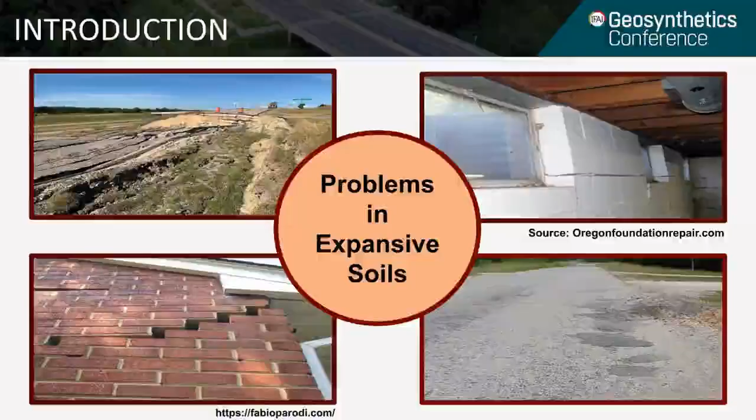Additionally, the basements of buildings are also affected due to the soil pressure of this kind of soil. On the bottom right, we can see pavements built on expansive soils suffer from rutting, cracking, and differential heaving due to the soil shrink-swell behavior of the expansive subgrade over time during its serviceability.

Now let us discuss in detail some of the major problems of pavements built over expansive soil in Texas. These soils are characterized by high plasticity indices and major swelling and shrinkage potential. On the right, we can see that when water migrates into these soils during rainfall, they undergo heaving. Alternatively, during summer months, when they dry up, they develop potential surface cracks. These problems affect the long-term performance of the pavements.

As a result, these roads need regular maintenance and substantial cost is involved in maintaining such pavements. Texas Department of Transportation Pavement Manual recommends certain measures to deal with such problems, which includes chemical stabilization with lime, cement, and other traditional and non-traditional stabilizers, replacement with superior quality geomaterials, which is not always a suitable option for some locations, and utilization of geosynthetics.

However, the cost of using geosynthetics with virgin aggregates may increase the overall project cost, and also the use of virgin aggregates is not a sustainable solution to pavement construction. As a result, in this project, we have tried to look into the effects of using a moderate quality base material known as reclaimed asphalt pavement aggregates, or RAP aggregates in short, in combination with a newly available geotextile and their effects on pavement performance.

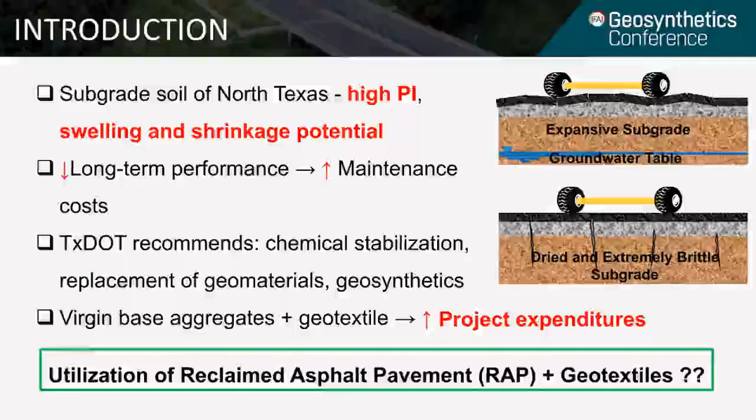In the present scenario, the use of recycled materials could provide us with long-term sustainable solutions. In an estimation by the National Asphalt Pavement Association, we have 102 million tons of RAP aggregate stockpiled all over the United States. In Texas, we have a fair share of stocked RAP aggregates which TxDOT plans to recycle and reuse instead of virgin aggregates. On the right, we see a picture of one such stockpile from where we collected the RAP aggregates for our laboratory studies.

A newly available wicking geotextile, popularly known as H2Ri, has been used in this project. This geotextile has special hydrophilic and hygroscopic deep groove fibers which are capable of draining out moisture in an unsaturated environment through suction. This single geotextile layer can perform multiple functions.

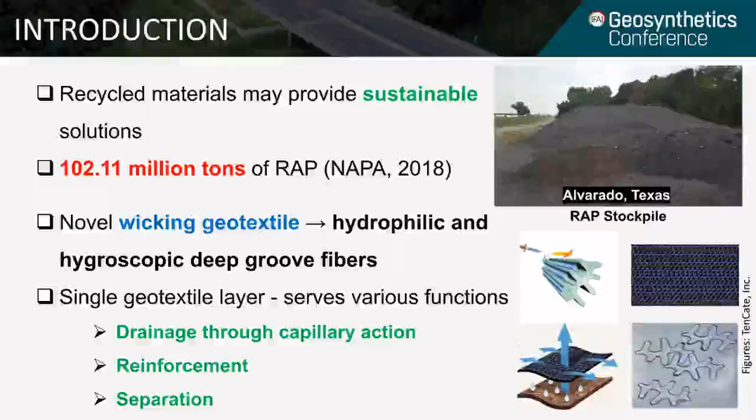In addition to the traditional separation and reinforcement function, this geotextile drains out moisture from pavement layers through capillary action rather than only gravity drainage.

This figure shows the schematic diagram of our test section, located at FM 1807, Venus, Texas. It predominantly sits on a high expansive zone as seen from the map. This location was chosen because of its history of pavement failure through cracks and ruts, even after maintenance by the TxDOT maintenance crew. The eastbound lane has been used as a test section, whereas the westbound lane was used as a control section.

The test section consists of a subgrade soil which is expansive in nature, followed by a 15-inch base course of RAP aggregates. The wicking geotextile was installed in between the base and the subgrade layer. The surface layer consists of a 2-inch asphalt overlay.

The test section was installed with a number of sensors as shown in the figures below. Shape array accelerometers were used for measuring the vertical deformation below the wheel path. Pressure sensors, or earth pressure cells, were installed to monitor the stresses at the top of the subgrade, and moisture sensors were installed to monitor the moisture redistribution pattern below the pavement layers.

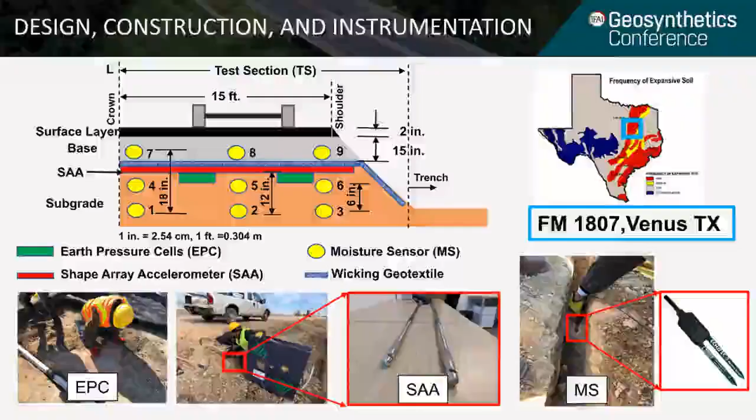The design of the test and control sections were performed using a standard design software recommended by the Texas Department of Transportation known as FPS-21. FPS-21 is a mechanistic empirical design procedure that uses a performance model based on the degradation of the serviceability index as defined in the AASHTO road test research.

The material properties of the pavement layers, the traffic loading, the change in serviceability rating, and the desired level of reliability are then used to compute alternative structural designs using FPS-21. The modulus of the subgrade for the reinforced layer was obtained by multiplying a modification factor as obtained from Lin et al. 2019. Design parameters such as annual average daily traffic, average traffic speed, and percentage trucks are shown in the bottom right corner.

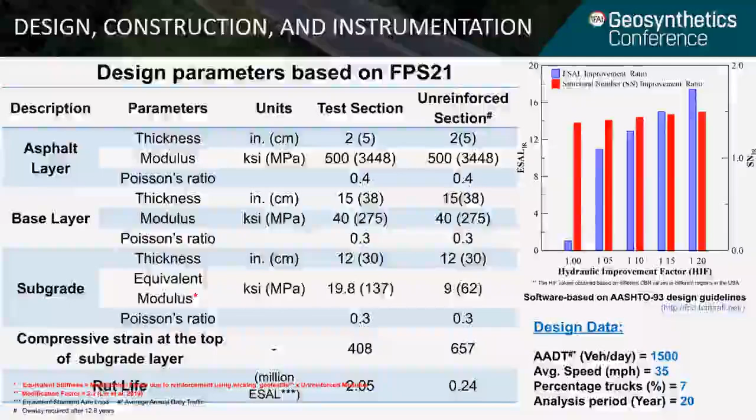The plot on the right shows the influence of the wicking fibers in improving the equivalent standard axle load and the structural number of the reinforced layers by the inclusion of a hydraulic improvement factor. This factor was obtained based on a study from different locations in and around the United States and Canada. Using the design data and the hydraulic improvement factor, a software listed on the manufacturer website was used to obtain the values of this plot.

Here we can see some of the steps involved during the construction of the pavement layers. It started with milling of the existing pavement layers, followed by excavation until the desired depth was reached. Thereafter, the subgrade layer was leveled and compacted using both pneumatic and drum rollers until the target density and moisture content was reached. After compacting the subgrade, the geotextile layers were laid on top of it.

After laying the geotextile layer, the pavement was again backfilled with RAP aggregates and compacted until target density and moisture content was reached. Thereafter, the pavement was kept open to traffic for another 7 days, after which the TxDOT construction crew came back and laid the layer with a prime coat and asphalt layer. After laying the asphalt layer, the pavement was rolled, and finally at the bottom right we can see the pavement after the construction was completed.

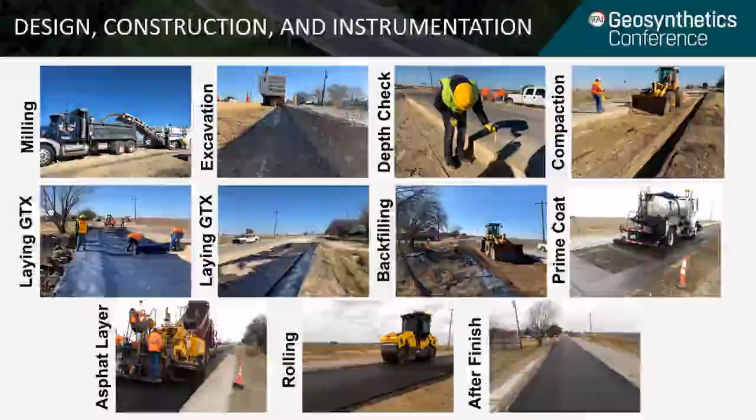Effect of wicking fibers on subgrade moisture. Here we would like to focus on an important property of the wicking fibers.

Currently, no experimental studies exist which indicate the influence zone of the wicking fibers. Therefore, in this paper, we try to introduce a preliminary concept for the estimation of the zone of influence up to which the wicking fiber has an ability to remove moisture in a fine soil subgrade.

In the past, some numerical studies have been done by Lin et al. for predicting the zone of efficacy of wicking fibers below and above the geotextile layer. However, they were mostly related to a different coarse-grained material. They indicated that the wicking fibers have the ability to drain out moisture as far as 3 feet from the fiber layers. They also noted that the primary efficacy of the wicking fiber to remove moisture reduces significantly beyond 15 inches from the geotextile layer.

Additionally, they also observed that a small reduction in moisture content could significantly increase the subgrade modulus.

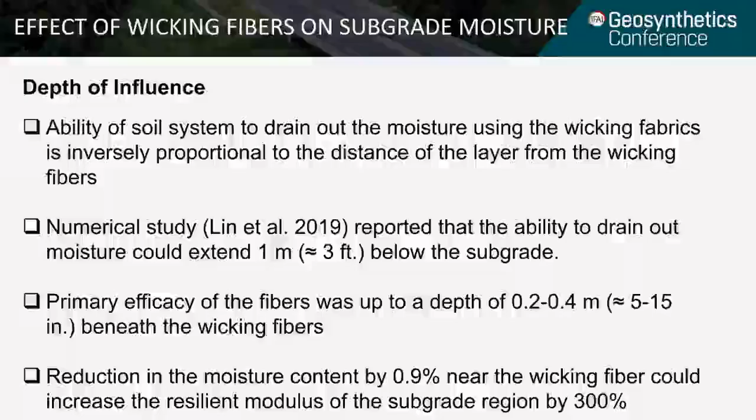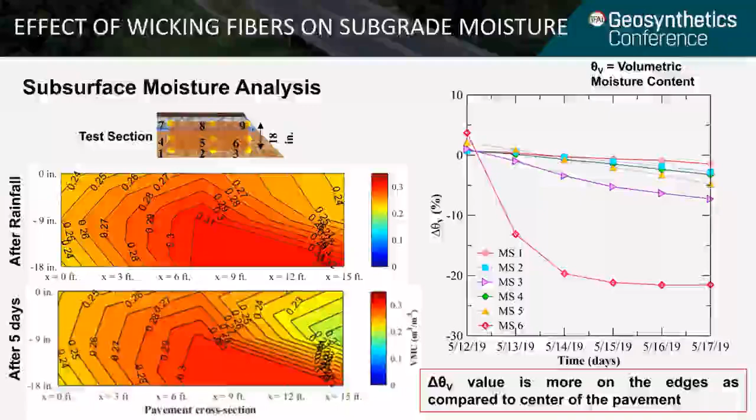After looking into the moisture conditions below the pavement layer, we now look into another important aspect of pavement performance: permanent deformation. As seen previously, the wicking fiber can rapidly drain out moisture from the pavement layer, which directly impacts improving the pavement modulus. As a result, the pavement undergoes lower permanent deformation due to the combined effect of the expansive nature of the subgrade and traffic loads.

Also, the geotextile has a higher tensile modulus property which reinforces the weaker subgrade and reduces the stress on top of it due to traffic loads. The combined effect of these factors is visible on the plot shown on the right.

The SAA sensors were used to monitor permanent deformation below the wheel path in the test and control sections. The test section showed lower permanent deformation compared to the unreinforced control section. The performance of the control section degraded significantly after a heavy rainfall event in May 2019. This indicated the overall efficacy of using wicking fibers in pavement layers.

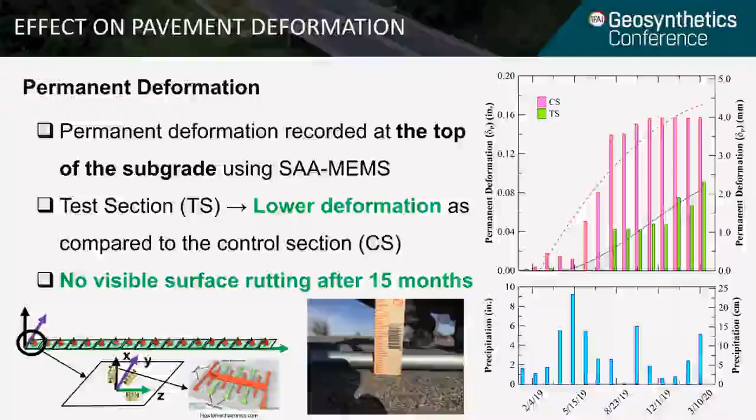Also, in the figure below, we can see that the pavement surface in the test section shows no visible rutting or cracking after the current monitoring period.

To conclude, we can say that the wicking geotextile was effective in redistributing moisture rapidly within the pavement layers after any rainfall event. The efficacy of the wicking fiber was more prominent near the pavement edges because of surface evaporation as well as the wicking action of the geotextile, compared to the center of the road.

The efficacy of the wicking fibers to remove moisture reduced by over 50% at 6 to 12 inches below the pavement layers. However, it should be noted that even a small amount of moisture reduction could substantially increase the resilient modulus response of the pavement, and hence affect long-term pavement performance.

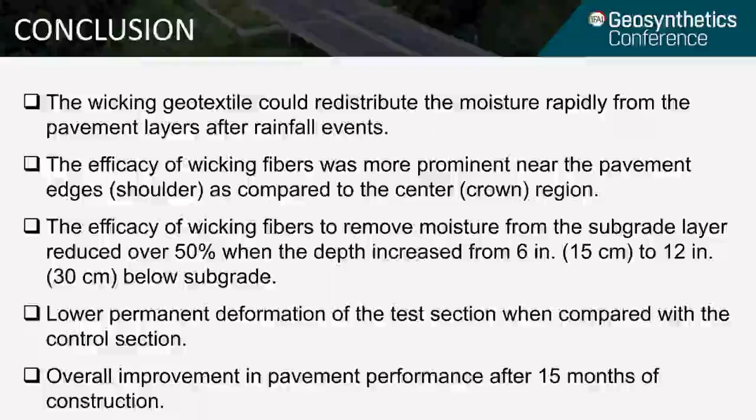Also, a lower permanent deformation was observed in the test section compared to the control section. Therefore, we can safely say that as of now, pavement performance has significantly improved due to the inclusion of the wicking fiber. We are currently monitoring pavement performance for another couple of years, after which we could provide some design recommendations and guidelines.

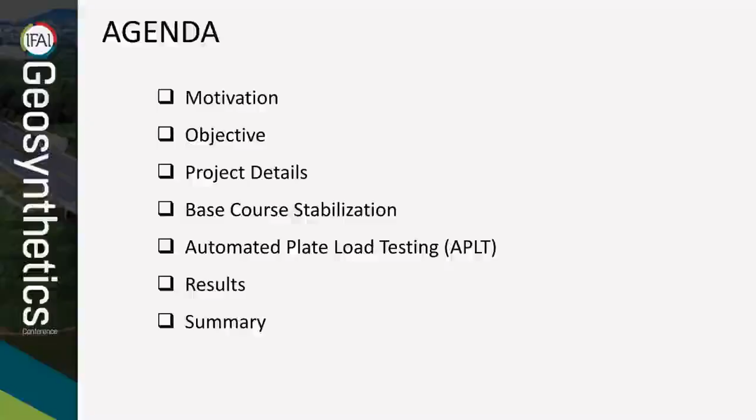This is the outline of my presentation. I will start from the motivation of the study, then the objective of the study, then describe some details of the project, then the concept of base course stabilization and automated plate load testing, then the results, and at the end I will summarize the key findings of the study.

Currently, laboratory-based testing methods are usually adopted for the characterization of pavement materials. Materials from different pavement layers are individually tested in the lab and used for deriving their mechanical properties. During pavement design and analysis, information from lab data is used for modeling pavement sections and estimating pavement performances.

But there are several challenges associated with lab-based characterization methods. This includes limited sample size, the lack of effective interaction between different pavement layers, and more importantly, there is no representative boundary condition.

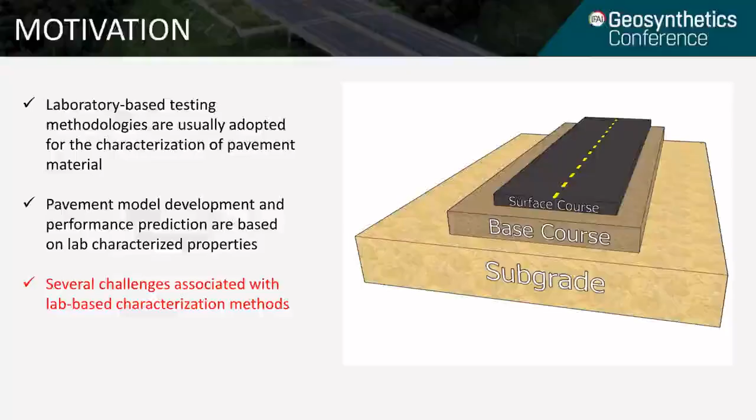For example, AASHTO T307 protocol is used for deriving resilient modulus of unbound pavement materials. Repeated load triaxial testing is performed on small cylindrical specimens for deriving resilient modulus values for different materials. The confinement applied in the cylindrical specimen represents the confinement that occurs in the field, and vertical axial stresses are applied at different load frequencies or stress levels to mimic the trafficking condition.

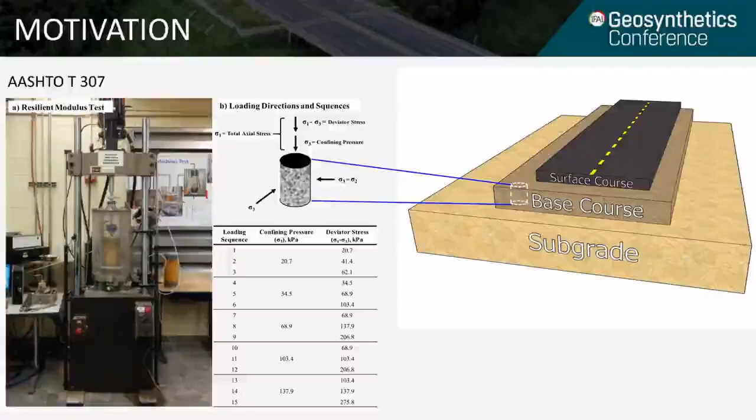But although this approach is very advanced, it still lacks the effective interaction of different pavement layers. In order to get around lab-based characterization methods, some field-based plate load tests are also performed using static or impact loads.

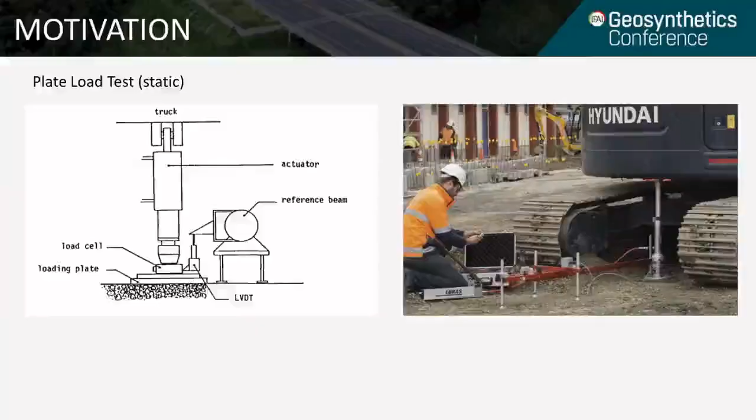Usually a truck, heavy vehicle, or other heavy object is used for applying loads, and these tests are performed by applying monotonically increasing loads. But again, the challenge with this type of test is that the loads are not representative or comparable to the traffic condition.

Falling weight deflectometer or heavy weight deflectometer are examples of plate load tests that use impact loads. The deflection basins due to the impact loads are analyzed for deriving pavement material characteristics. But the impact loads used in this type of testing are not representative of actual traffic conditions.

So we need a different kind of plate load test that uses dynamic loads and is more representative of actual traffic conditions. In this study, we use automated plate load testing that uses dynamic loads.

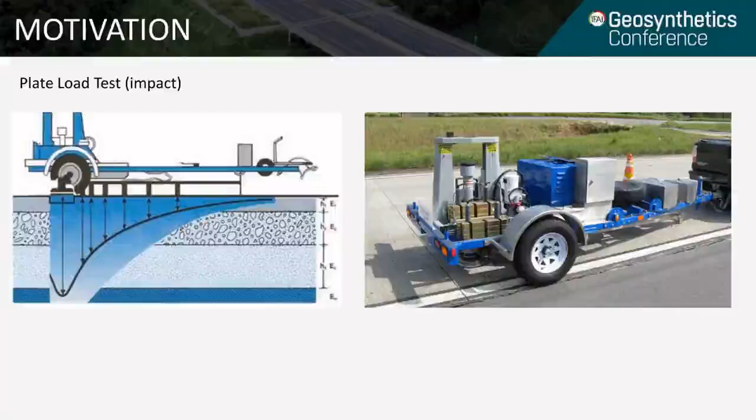The objectives of this study are to evaluate in situ mechanical properties for geogrid stabilized and unstabilized pavement using the APLT system, or automated plate load system. The unstabilized pavements represent pavements without any kind of geogrid. Another objective is to measure resilient and permanent deformation responses, and the last objective is to estimate pavement model parameters such as composite modulus and layer-specific modulus for HMA, aggregate base course, and subgrade.

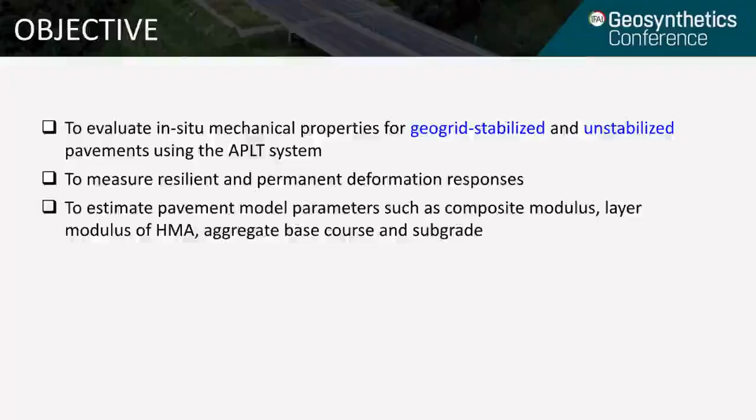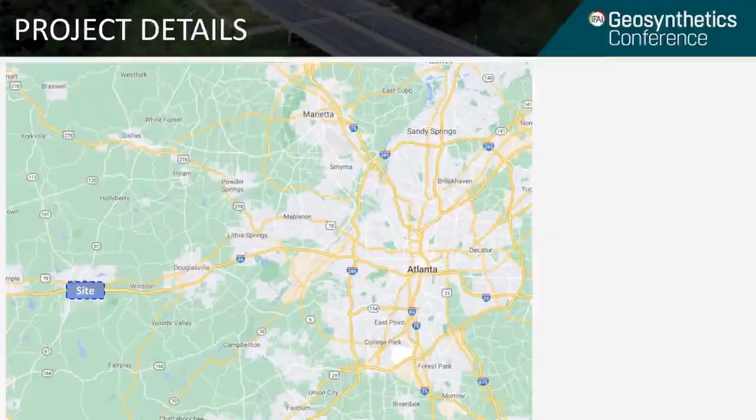The project site was located near Atlanta, Georgia. The test sections were part of Interstate 20, located about 30 miles west of Atlanta. There were three sections: Section A, Section B, and Section C. Section A and B were geogrid stabilized sections, whereas Section C was an unstabilized section, or control section.

In the case of geogrid stabilized sections, the thickness of aggregate base course was reduced by 20 to 40%, whereas the thickness of HMA was the same for all cases. There were also some small differences in the subgrade condition. The subgrade CBR ranges between 15 to 25%.

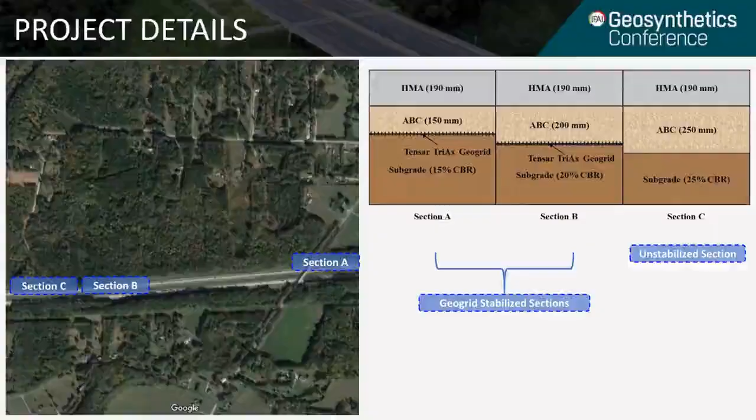Geogrid stabilized sections were prepared by placing a layer of geogrid at the interface of base and subgrade. A triangular aperture geogrid was used for these projects, and the properties of the geogrid are shown in the table.

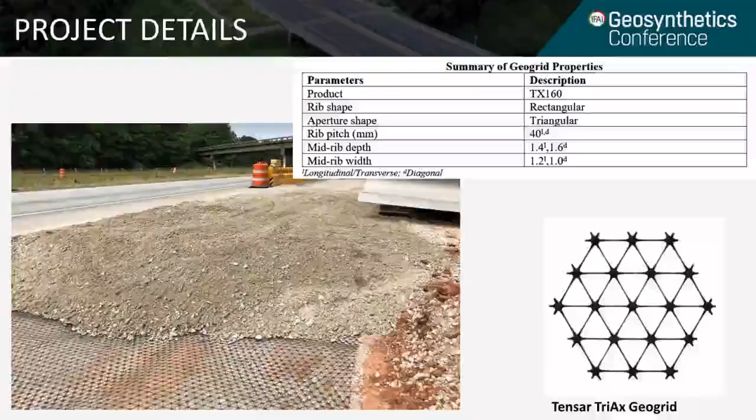Let's talk about the benefit of using geogrid through the concept of base course stabilization. When a geogrid is introduced at the bottom of the aggregate layer, it creates different confined zones within the aggregate layer. A layer close to the geogrid will be fully confined, and as we move further, the confinement level decreases. But in general, geogrid plus soil will form a composite, strong, and stable aggregate layer.

This can be explained by the lateral restraint of the aggregate at the bottom of the aggregate layer. The use of geogrid will prevent lateral movement of aggregate, and this can also be explained by the change in the shear failure plane caused by using a geogrid. That is, when a geogrid is used, it will prevent shear failure of the subgrade.

So base course stabilization will contribute to enhancing the stiffness of the aggregate layer and also retaining the stiffness of the aggregate for a longer period of time. This is a little bit different from the concept of reinforcement.

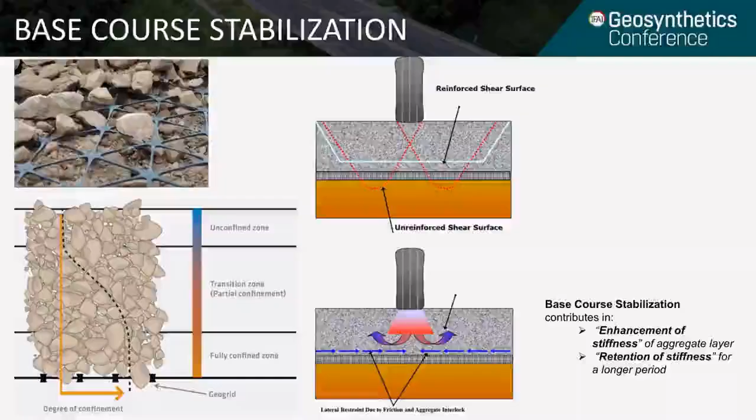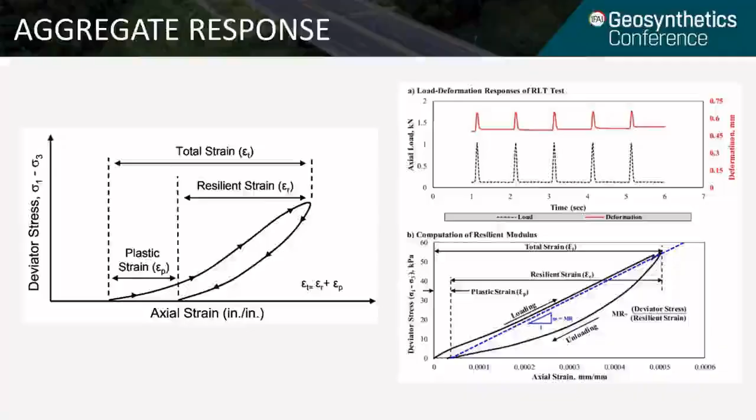Unbound aggregate layers possess elastoplastic behavior. That is, for each load application or loading cycle, the total deformation experienced by the layer will be the sum of permanent and resilient deformation. A portion of the deformation induced in the pavement is plastic deformation, and the rest rebounds as resilient deformation. So we need to understand how the pavement behaves due to repetitive load.

The APLT system can measure both resilient and permanent deformation responses from the pavement surface using precise measurement. In fact, the APLT system is an advanced portable laboratory where a plate load test can be performed by varying different loading conditions such as loading rate, load magnitude, and different types of plate.

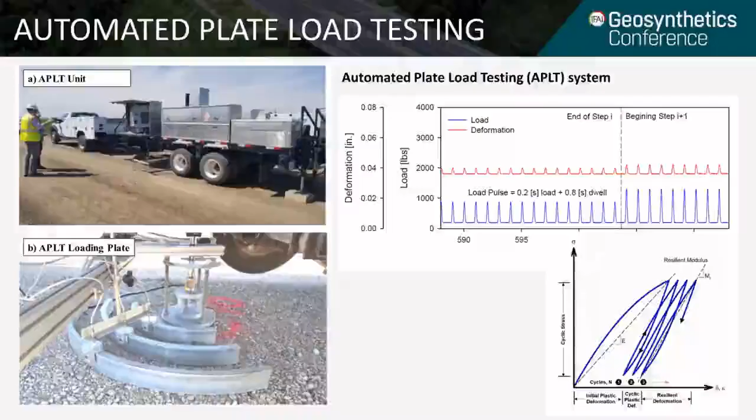In this figure, the top right shows an example of raw data. The blue line shows the load pulses of different magnitude, and the red line shows the measured deformation responses. We can separate both resilient and permanent deformations from the raw data for further analysis. Figure A shows the APLT system from the actual site, and Figure B shows the loading plate in the center, with 3 additional sensors on top of the arc. Those external sensors were used for back-calculating the layer-specific modulus.

In this testing, the tests were performed in 5 different steps. In all steps, a cyclic stress of 482 kPa was used for applying the cyclic plate load, and the loading frequencies were changed from 2 Hz to 0.01 Hz. The number of load cycles were also varied—for step 1 it was 2000, but for other steps it was just a few cycles.

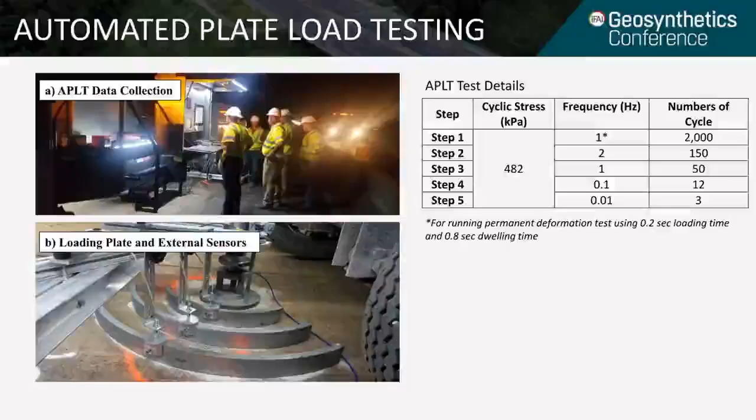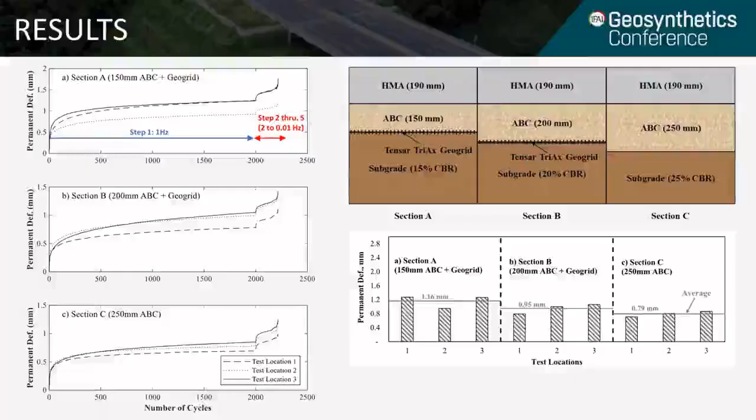The permanent deformation responses from the test sections are shown in this figure. For each test section there are 3 curves, and each curve represents one spot test—that is, 3 APLTs were performed per test section. The deformation response mainly from step 1 of loading, up to 2000 cycles, was used for analyzing the permanent deformation response. Usually the response rapidly increases at the beginning, and after about 200 cycles it continues increasing gradually. But in general, the permanent deformation induced in the 3 test sections was very similar, less than 1.2 millimeters.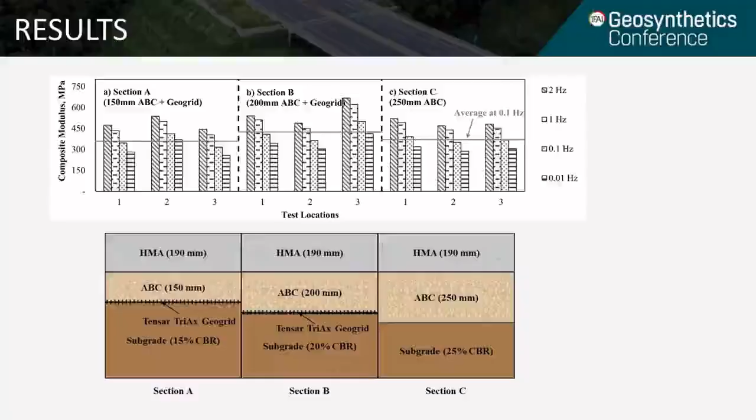When we compare the performances or composite modulus of different sections, the result shows that the stabilized section with 200 millimeters of aggregate base course has the highest composite modulus, whereas the other two sections, section A and section C, have comparatively similar composite modulus.

The resilient deformation responses under the loading plate are used for deriving the composite modulus, whereas the deformation responses from the other sensors close to the loading plate are used for deriving layer-specific modulus. This concept is similar to the concept of FWD or SWD.

This figure shows the layer-specific modulus for HMA, showing how the HMA modulus changes with loading frequency. Similar to the composite modulus, HMA modulus also changes with the loading rate. For the highest loading rate, the HMA modulus is high, and it decreases with decreasing loading frequency.

These are the results for the aggregate base course. The change in the aggregate base course modulus with loading frequency is similar to the HMA modulus or composite modulus. But one distinct thing we can see from these results is that the aggregate base course modulus for the stabilized section was higher than that of the unstabilized section, despite the difference in layer thickness. Also, when the loading rate is increased, the aggregate base course modulus rapidly increases, but such change is not seen for the unstabilized section.

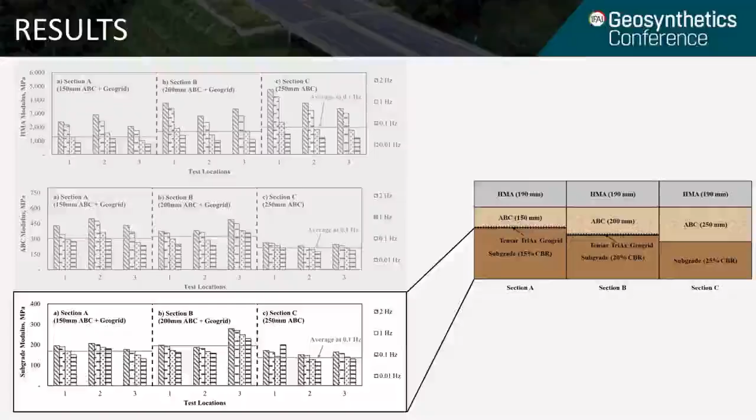The results also show that the subgrade modulus for the stabilized section is higher than that of the unstabilized section. When a geogrid is introduced at the interface of base and subgrade, it will also have some effect on the subgrade by reducing the stress on it. This reflects in terms of enhancing the mechanical properties of the subgrade, which you can also see from this result.

In summary, in this study we measured both resilient and permanent deformation responses from geogrid-stabilized and unstabilized pavement using the APLD system. The total surface permanent deformation responses from both sections were sensitive to the loading frequency as well as the loading cycle. The total permanent deformation induced in all sections were very similar, with deformation responses less than 1.2 millimeter.

The stabilized pavement with 200 millimeter aggregate base course had the highest composite modulus, while the remaining two pavement sections had a similar modulus. Recall that the composite modulus is a direct indicator of pavement performance. The back-calculated modulus of geogrid stabilized pavement sections were higher than that of the unstabilized section. Similar to the pavement permanent deformation, the composite modulus were also sensitive to the loading frequency as well as the load cycles.

Looking at the back-calculated aggregate base course modulus, the rate of change in ABC modulus with loading frequency was distinctively seen for the stabilized pavement, and more prominent for the stabilized pavement with 150 millimeter of aggregate base course. That is, when the geogrid is introduced in the aggregate base course, it has a direct effect, or the geogrid is directly sensitive to the loading frequency. So these are the summaries from the testing.

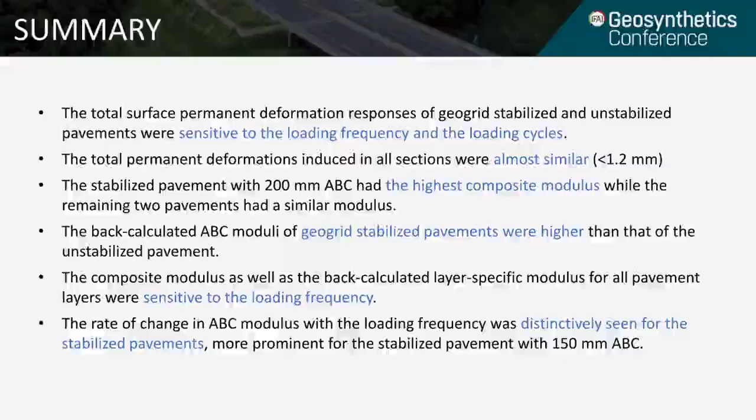One thing you may have noticed is that we used only one type of loading condition, in the sense that we used only one stress level. In future we'll be using more than one stress level, so that it would be more representative of the actual loading condition. So these are the summaries.

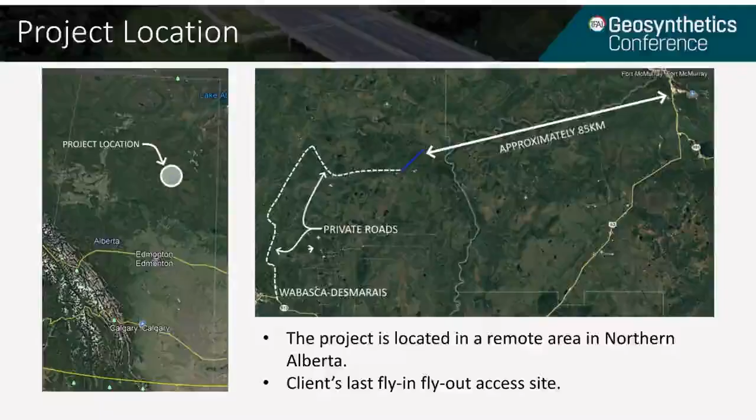It's about 85 kilometers from Fort McMurray. However, access to the site is only available through private roads off a highway near Wabasca, which is a hamlet in northern Alberta. These private roads are frequently used as logging routes. Because this road is in such a remote location, this site in particular was our client's last fly-in and fly-out access.

Here's a slightly more zoomed-in view of the access road on the right. As mentioned in the last slide, this access road was being built to provide all-season access to our client's last fly-in, fly-out only site. Prior to our involvement, the client would build ice roads every winter to access the site, and these would melt in summer, leaving access only by ATV or helicopter.

The reason they had not built a more permanent road before is because of the poor soil conditions in the area. Much of the site is covered in muskeg. If you've been to northern Alberta, you'll know what muskeg is like - it's a peat-like substance, high moisture content, fibrous, very difficult to build on. On top of that, the site was in a very environmentally sensitive area, so it was of utmost importance to limit the footprint of the permanent road.

Our client was also expanding the site and needed to transport some large prefabricated structures. The type of vehicle required to move these structures don't always have the best turning radius, so we had to balance the need to allow turning movements of this oversized vehicle while minimizing our road footprint. Other challenges included making sure road construction would not impact a small creek and existing transmission lines, as well as planning the construction sequencing. Since the road could only be accessed on one side, coordinating haul trucks on a narrower road had to be managed as well.

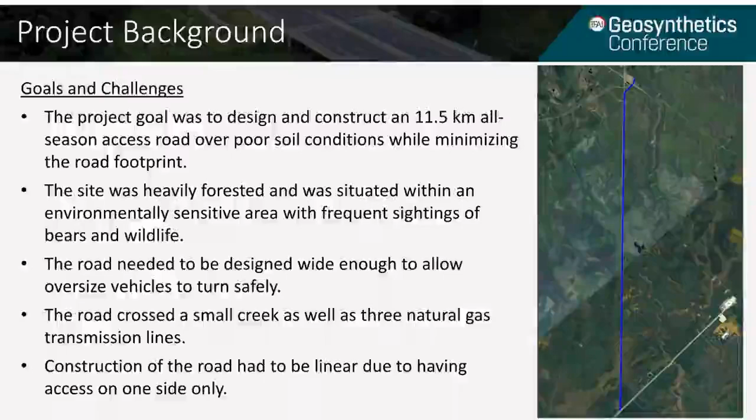You'll see here some photos of the site conditions from site visits in 2015 and 2018. As you can see, the site is quite wet.

The field investigation program for this project included ground penetrating radar, muskeg depth probing, and dynamic cone penetrometer testing where feasible. What we identified is that about 8 kilometers of the total 11.5 kilometers consisted of very soft muskeg deposits, while the other 3 kilometers had a range of soft to firm clay. The muskeg deposits were as deep as 2 meters in some areas.

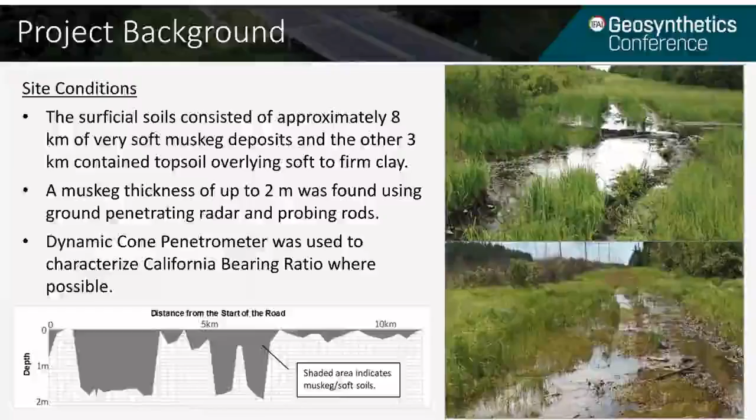Shown at the bottom of the slide is a simple sketch showing the presumed depth of muskeg or soft soils found in the field investigation. As you can see, the depth is not consistent over the whole site, which led us to varying thicknesses in design based on site conditions.

In muskeg, one traditional method is to remove all of it and replace it with competent soils. In this project, we did not pursue this process for budgetary and environmental reasons. I don't have personal experience with such construction methods, but I have talked to construction managers who have done the traditional method. What I'm told is that one of the additional challenges in this conventional method is that when the muskeg is removed, the remaining ground can still be quite uneven and difficult to work with.

The alternative design, which is the subject of this paper, incorporated 2 layers of geocell, woven and non-woven geotextiles, and sand and gravel as fill materials. The structure was incorporated into a road cross-section with a 7-meter wide road top and a side slope of 2.5 to 1, compared to a typical side slope of 4 to 1 standard for many road projects. The sharper side slope was chosen to reduce the project footprint, and the steeper side slopes relied on the presence of geosynthetics to stabilize the fill.

The structure was designed to have an appropriate factor of safety against rutting, as mentioned in Pokharel 2010, and against hoop stresses induced by vehicle loading. Vehicle load considerations included the vehicles expected after road construction, but also vehicles during construction of the road, and loads for construction of the site upgrades.

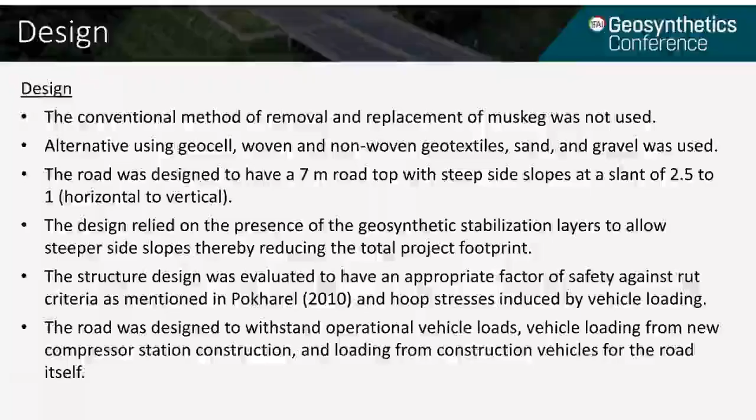Here's our design schematic. The top schematic references the structure in areas with no deep muskeg, and the bottom schematic shows the structure in deep muskeg. As mentioned, the muskeg or soft soils depth varied along the profile, so we characterized the differences and came up with 4 categories: 500 meters of dry, firm clay subgrade, 2,500 meters of clay subgrade with moderately well-draining surroundings, 4,500 meters of soft clay and muskeg with a high water table, and about 4,000 meters of deep muskeg.

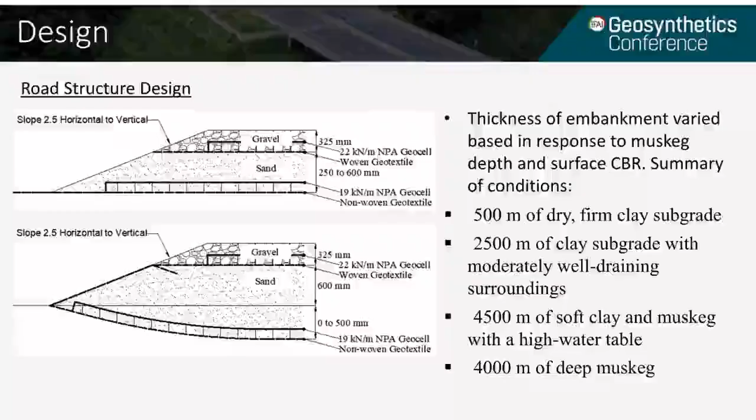Looking at the sketch, the construction sequence would first install a high-strength non-woven geotextile on top of existing ground, stretch a layer of NPA geocell over it, fill it with sand, which would be placed slowly, allowing the structure to settle until equilibrium was reached. Subsequent sand lifts would then be placed until the desired thickness was achieved. Following this would be placement of the woven geotextile, another layer of geocell, and placement and compaction of crushed gravel. Here you can see a summary of the material properties.

If you look at the NPA geocell properties, you can see that I've distinguished between the top and bottom layers of geocell, and it has to do with the purpose of each layer. The bottom layer is used to confine the sand and prevent shearing of muskeg. The main loading on this bottom layer would come from self-weight of the fill material, and therefore the stiffness of the geocell does not have as much of an impact.

Compare that to the top layer geocell, which needed to be stiffer to increase the total modulus of the pavement structure to prevent rutting. The increased stiffness of the geocell also helps prevent bursting of the geocell due to heavy traffic loads.

For geotextiles, a 1,330 Newton non-woven geotextile was used for the bottom layer with 50% grab elongation in order to stretch appropriately as the muskeg settled. The higher grab tensile strength was chosen to increase factor of safety against geotextile rupture. The middle non-woven geotextile was 911 Newtons, and the woven geotextile was placed under the top layer of NPA geocell and had a grab tensile strength of 911 Newtons. We chose free draining materials for the infill in the geocell, and it was important to keep the percentage of fines in sand relatively low to keep this free draining characteristic.

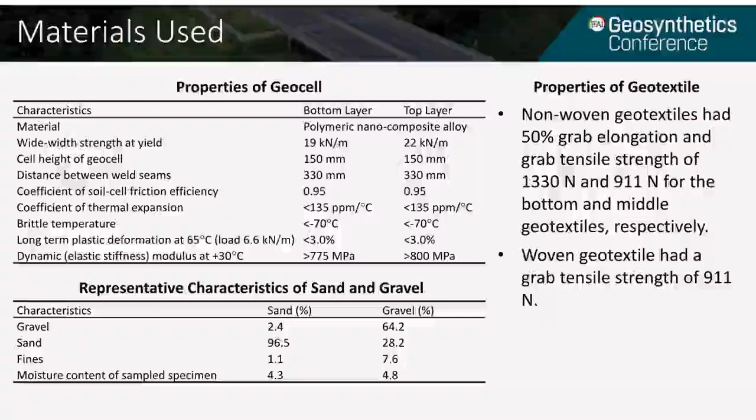Now we'll show you some photos from the construction phase. Shown here on the left is the bottom layer geocell with a non-woven geotextile underneath it. On the right, you can see a dozer pushing the fill sand into the geocell.

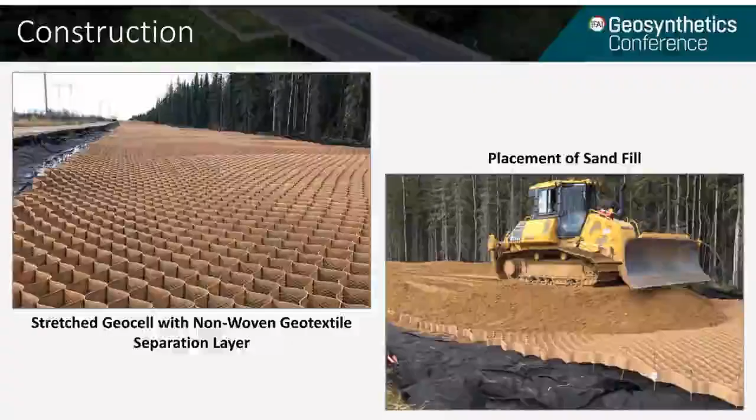When filling geocells, it's important to make sure that the construction equipment does not simply push the fill material horizontally. Sometimes this can cause the geocell to shift and lose optimal stretch dimensions. Instead, construction equipment is supposed to lift the material as it approaches unfilled cells and gently allow the sand to fall vertically toward the cells. You can kind of see what I'm talking about in the picture on the right, where the dozer blade is slightly elevated above the grade of the material.

On the left here, we have a photo of the type of rock truck used to transport the material along the road. As you can see, the rock trucks are quite wide, so it required careful coordination to make sure these trucks could safely pass one another as they made their rounds.

Here's a pro tip if you ever work on a project like this. If you're nice and courteous to the rock truck drivers and you don't have a vehicle on site, I found that a lot of them are friendly, so they're willing to give you a lift up and down the road.

Also shown in the left photo is the temporary matted workspace that was set up using rig mats. This temporary matted workspace was important to keep workers safe while the rock trucks and other construction equipment built the road. It was also very helpful for transporting sections of geocell and rolls of geotextile without holding up the material haul. On the right, we have a packer, or a smooth drum roller, compacting the fill material.

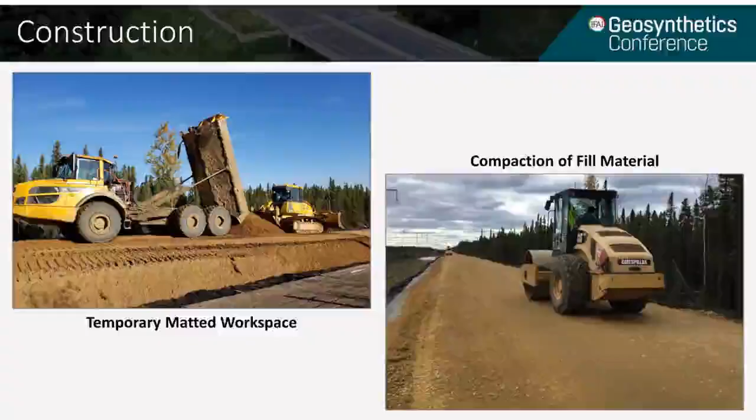On the left here is a photo of a water truck adjusting the moisture content of gravel on the road to ensure compaction within a range near the optimum moisture content. You can also see the woven geotextile that was used in the top layer. Ideally, aggregate should be at optimum when brought to the road. However, as this site was very remote, the material had to be stockpiled at another remote site, meaning that moisture control was not that easy.

Here on the right is the completed top layer gravel fill. It might be a little hard to make out, but if you look far in the distance in this photo, you can see a truck parked off the road. During construction, we also had temporary turnabouts situated every few hundred meters to allow the rock trucks to turn around. This was good as there was not enough room on the main road to do so.

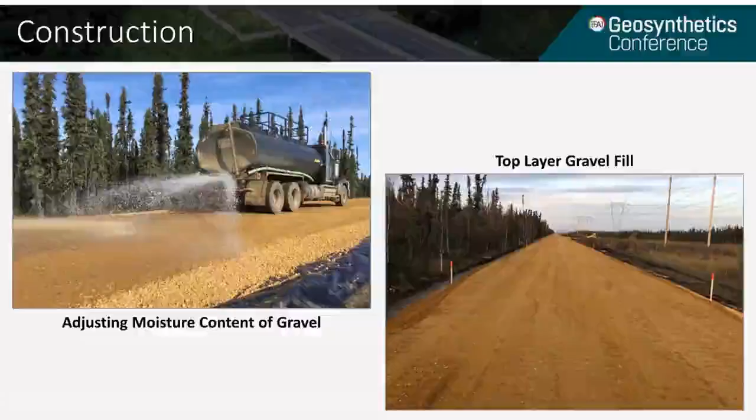I'll speak a bit to the construction sequencing here and just show you some of the unique techniques that were employed in this particular project.

In the first photo, you can see them laying out geotextile using a combination of equipment and human effort. On the left of that photo, you can see the geotextile is hooked onto a nodwell, and as the nodwell backs up, geotextile is laid out more and more. In the second photo, you can see the labor effort being used to stretch the geocell in a straight line. Then in the third photo, you can see the geocell after it's been stretched in place.

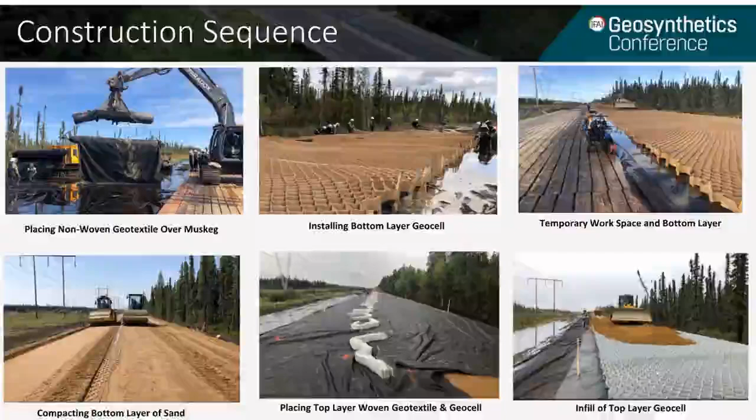Moving on to the bottom row, in the first photo you can see the sand fill has been placed and is being compacted. In the second photo, woven geotextile has been laid on top. For the geocell on top of the geotextile, you can see individual sections snaked out along the middle. Each of these sections will be stapled together and then stretched as a whole, like you see in the third photo.

As of November 2020, the road has exhibited no operational concerns and is performing to the desired quality. Confirmation of this performance is based on visual observations from regular users of the road, including one of our authors, the contractor's PM, and the client representatives. In the most recent inspection, the road surface has revealed minimal rutting, and there were no instabilities identified in the road embankment.

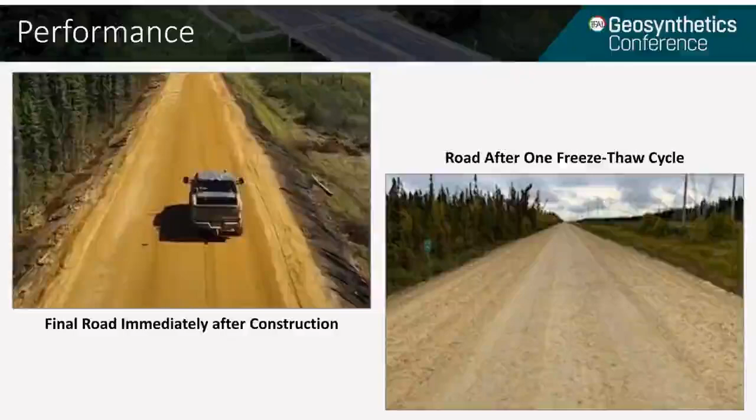To give you an understanding of the quality of the road, we had some individuals joke about the road being too high quality for a gravel road. Turns out some drivers were encouraged to speed due to how good the condition of the road surface was compared to other private roads in the area. So go figure.

As mentioned before, having only one access point to the road was challenging, and it limited our construction schedule. Due to the linear nature of the road construction, constructing a greater length of bottom layer prior to installing the top layer was desirable from a scheduling perspective. The greater length before top layer construction, the more the sand composite basal layer was subjected to frequent construction loading from rock trucks. So the geocell reduced stress directed to the muskeg subgrade, allowing for greater lengths to be used while keeping the embankment stable.

Now the finished portions of the access road, the front of the access road, were constantly under heavy traffic, as that was the only route of travel. Even with this amount of travel, coupled with the rainy season that the construction team had, the construction crew had to do minimal maintenance when building.

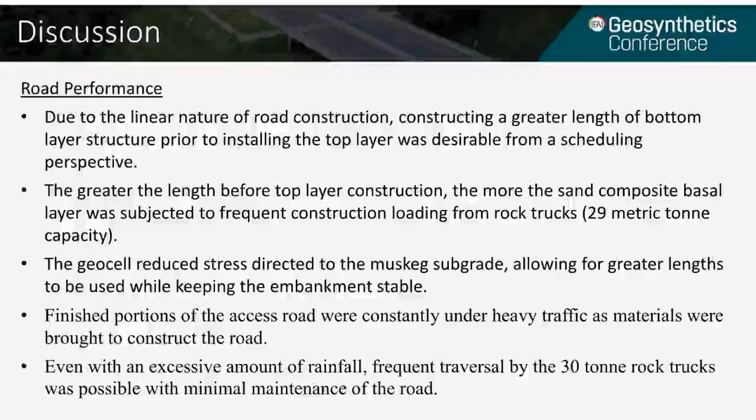Generally, based on comments from the construction crew as well as reporting, it was found that our predictions were mostly accurate. There were some deviations, but it is understood that some of it came from increased rainfall as well as clearing of trees, both of which affected the expected water and surface elevations. The accuracy can be attributed to the data we got from field investigation.

We found that out of all the sources of data, the ground penetrating radar was the most accurate in predicting site conditions. Probing and the dynamic cone penetrometer were good for shallow information, but due to their short reach, they did not identify the depth of muskeg well.

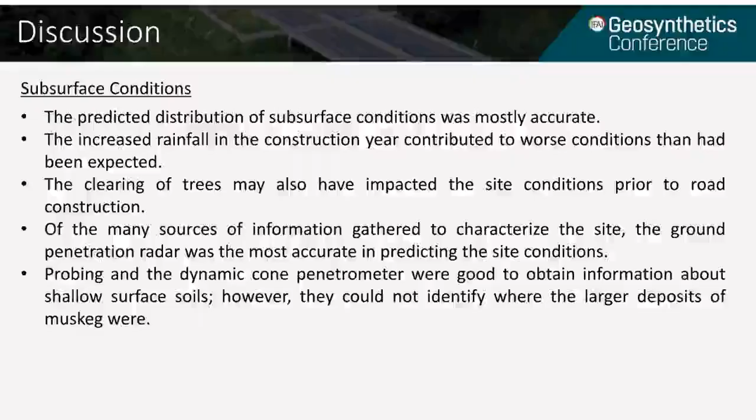The design was compared to a conventional method for cost savings. As you can see here, we had approximately 62,600 cubic meters of muskeg removal savings, approximately 2,900 cubic meters of gravel fill savings, approximately 37,550 cubic meters of embankment fill savings, and savings on the cost of aggregate supply alone was estimated to be 66%, and aggregate haul with a 140-kilometer haul distance was estimated to be 77%.

It's also worth noting that the fewer number of haul trips and the less aggregate volume are factors that contribute to reduced CO2 emissions.

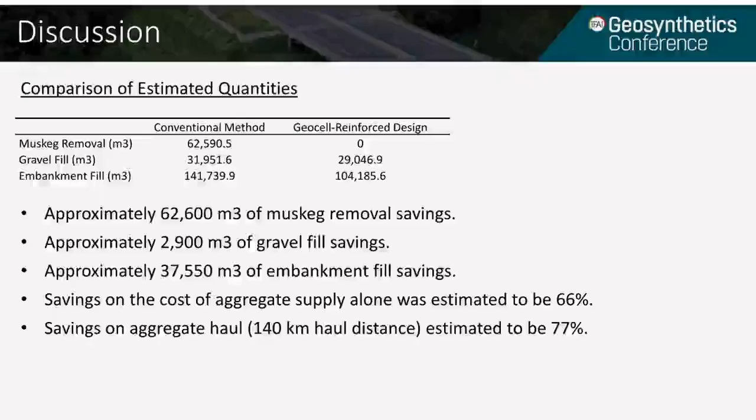So here's the conclusions. The two-layered NPA geocell design was used as an alternative to the conventional method of removing and replacing muskeg with competent fill, which resulted in a reduction in aggregate volume of approximately 66% and reducing CO2 emissions by approximately 77%. Construction of the road was carried out as per the design intent and successfully provided access for construction and operational vehicles.

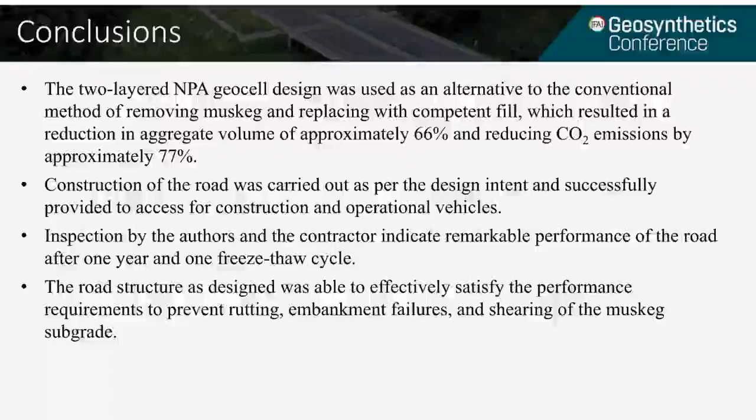Inspection by the authors and the contractor indicate remarkable performance of the road after 1 year and 1 freeze-thaw cycle. The road structure as designed was able to effectively satisfy the performance requirements to prevent rutting, embankment failures, and shearing of the muskeg subgrade.